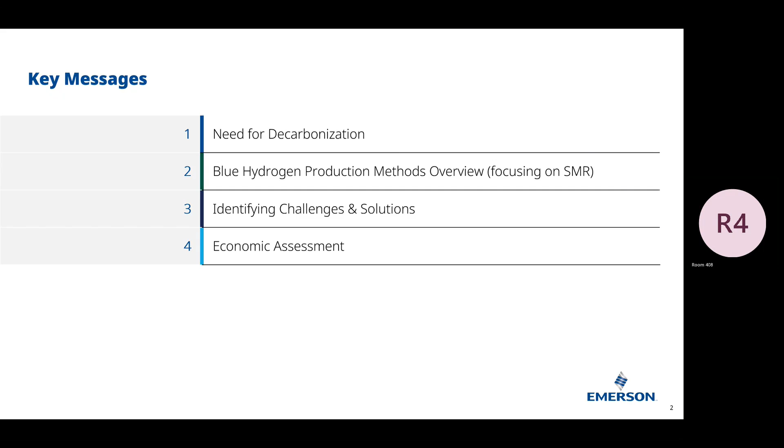So, need for decarbonization. The United States has re-entered the Paris Climate Agreement. And along with other countries, now there's been emphasis on decarbonizing emissions and exploring new energy markets. In fact, the global demand for hydrogen is expected to reach almost $12 trillion by 2050. And feedstock natural gas for blue hydrogen production primarily. There are other methods with coal. But because of the natural gas supply in the United States and Canada, blue hydrogen production is very prevalent in North America.

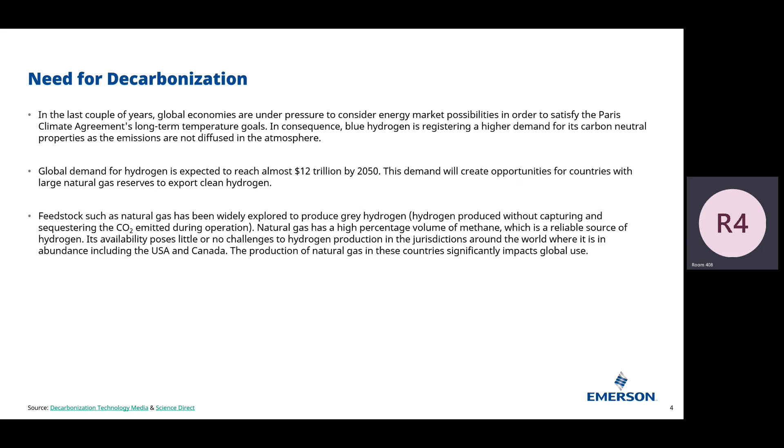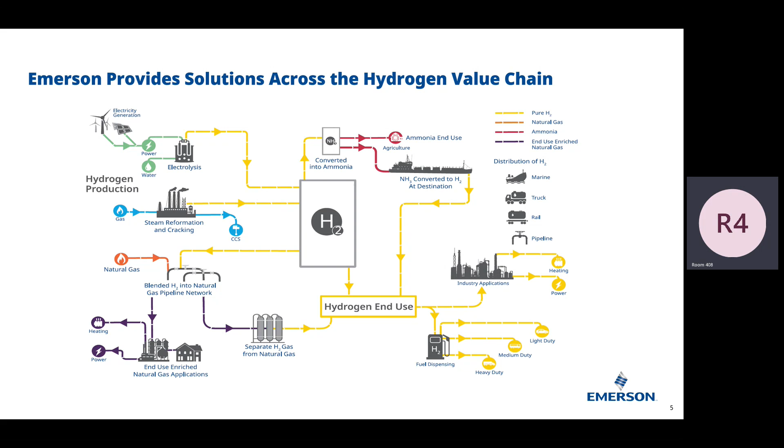So Emerson has products that cover the full value chain of hydrogen production. We have an ebook on green hydrogen, which is through electrolysis. We won't be discussing that today. We'll be focusing on steam reforming and primarily using natural gas as the feedstock for that. So I'm also going to go over the end use of hydrogen, specifically for industrial applications, even though they could be used for fuel cells and to produce ammonia.

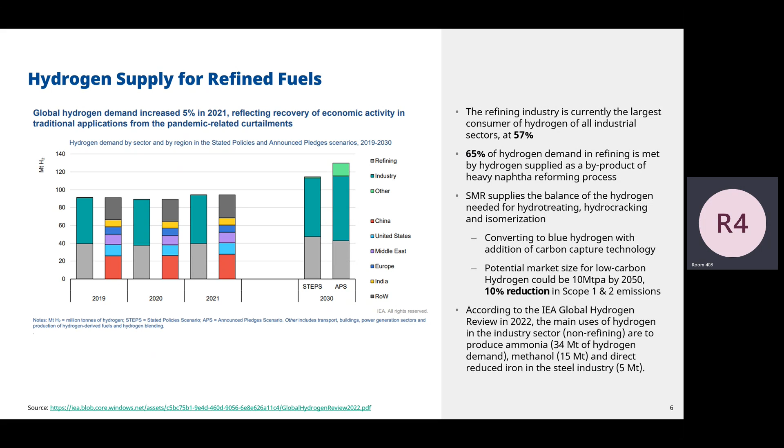Okay, so refineries are the largest consumers of hydrogen. They consume about 57% of the demand. Mostly the hydrogen is supplied as a byproduct from the heavy naphtha reforming process. And this balances out with the SMR process, which currently is primarily gray hydrogen. So the difference between blue hydrogen and gray hydrogen is the carbon capture portion. If you add carbon capture, that is then categorized as blue hydrogen. And so I grabbed this chart here from the International Energy Agency. You can see here, refining consumes most of the hydrogen supply, as well as other industries. And then the bar next to it shows the world areas that are consuming the global hydrogen demand.

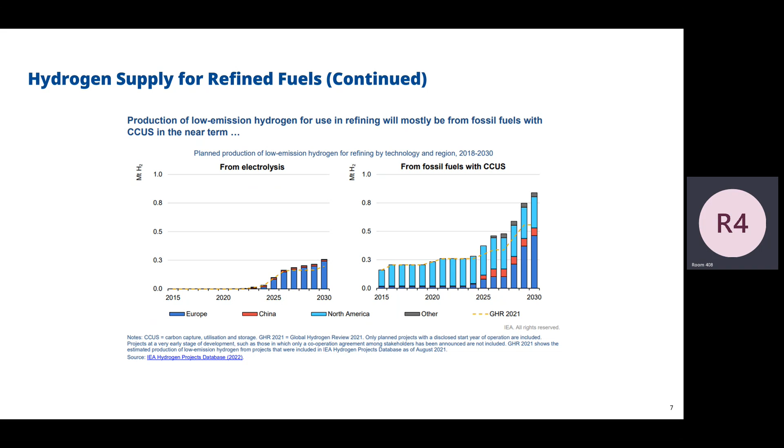All right, so moving along, refining. Fossil fuels will likely be the source of hydrogen production with carbon capture, not electrolysis. And biofuel production will also increase the global hydrogen demand because renewable diesel requires more hydrogen than traditional diesel processing. And there's also state incentives for biofuels. California is the leader in this, and Oregon, Washington, and British Columbia are also following those incentives as well.

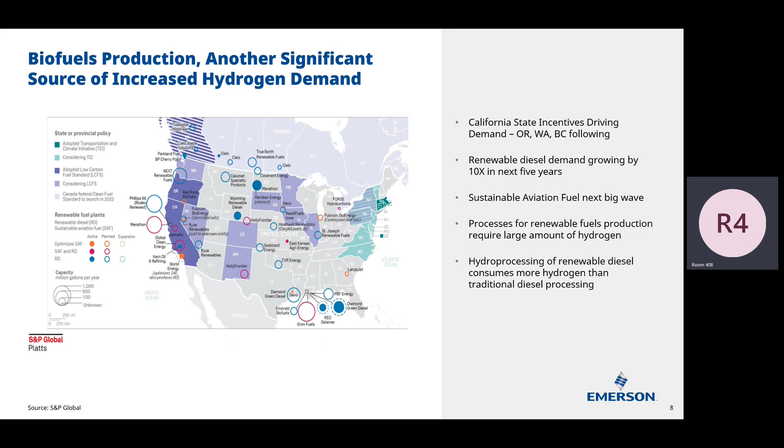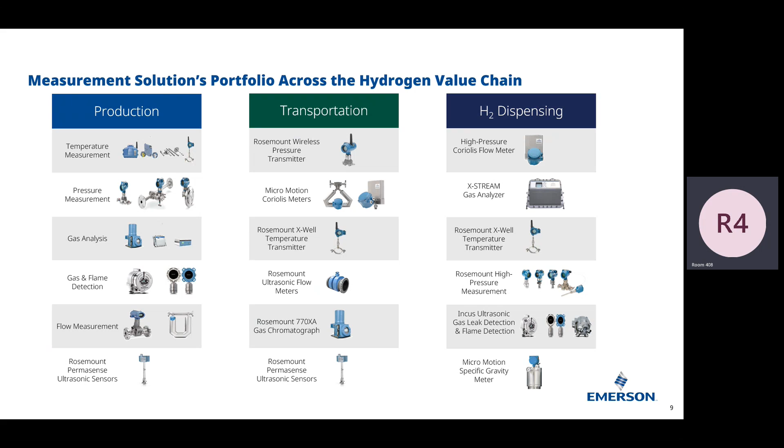So Emerson has measurement products for the production portion, transportation, and hydrogen dispensing. For blue hydrogen, it's not shown here, but you can also use a density meter as well. But I will be covering that in another slide.

So let's talk about the blue hydrogen production process. So aside from steam methane reforming, there's autothermal reforming and partial oxidation, which I refer to as POX. And I won't go into detail on that, but SMR is currently the primary method for producing hydrogen, but right now, gray hydrogen. So don't assume that mostly it's blue hydrogen. It's certainly gray. And natural gas is the main methane source for the hydrogen produced by industrial facilities and petroleum refineries.

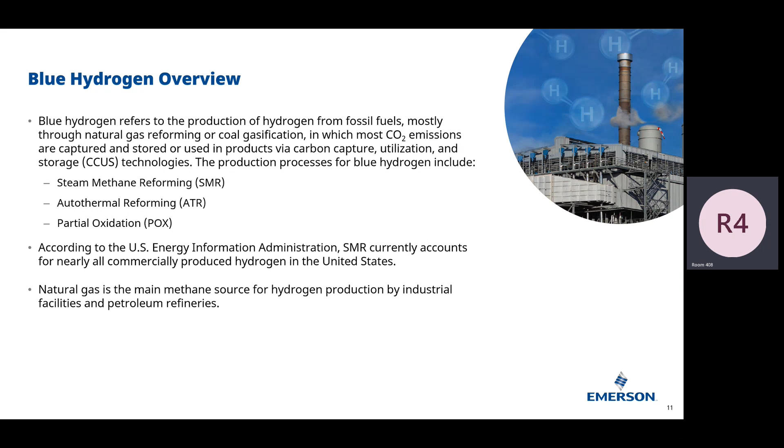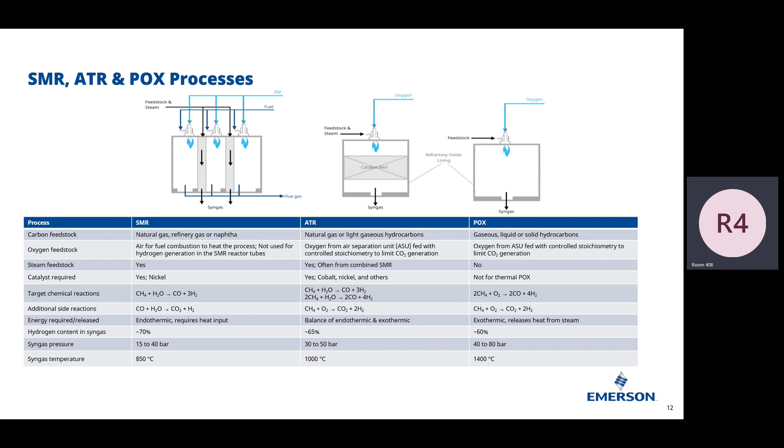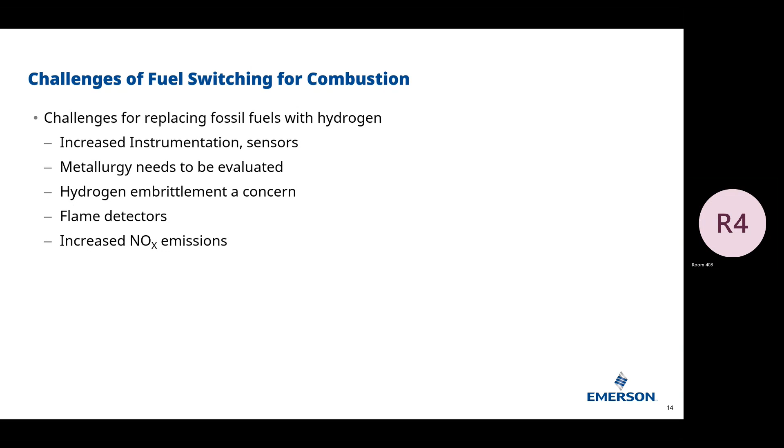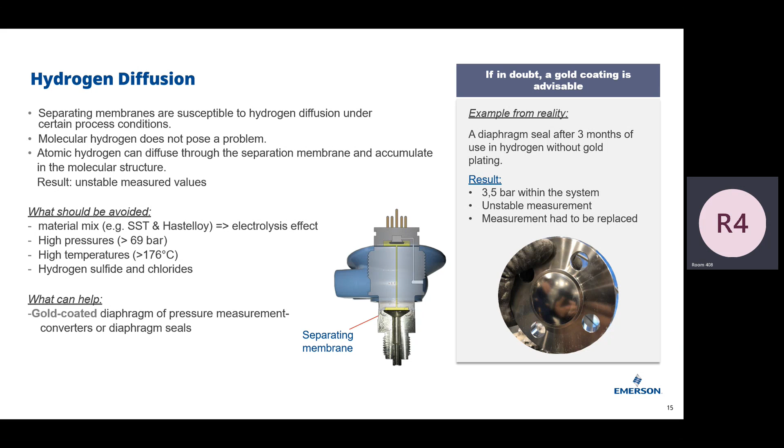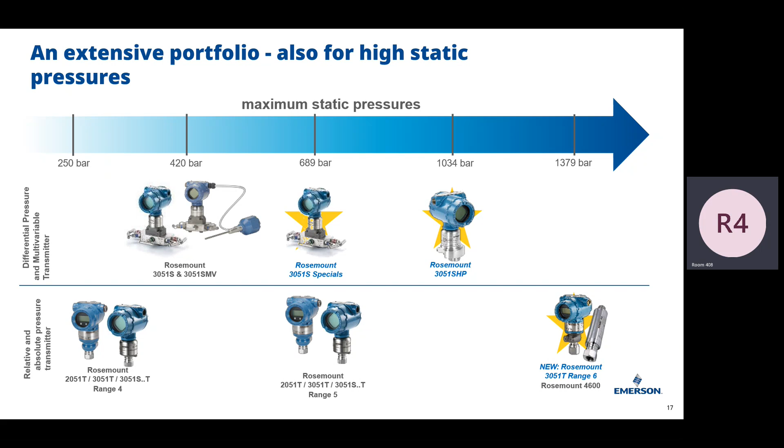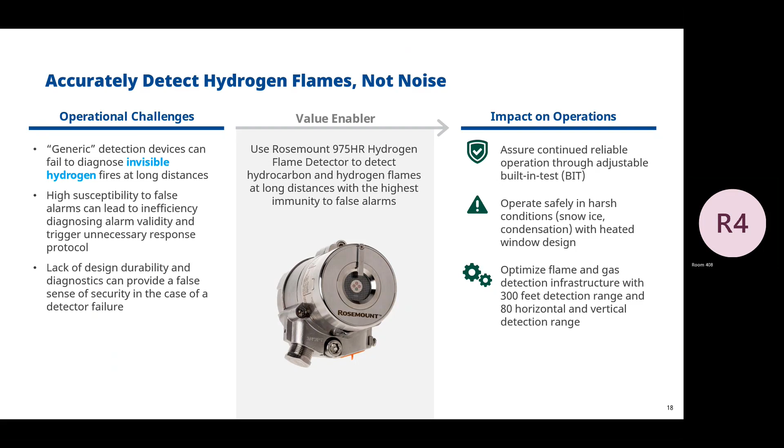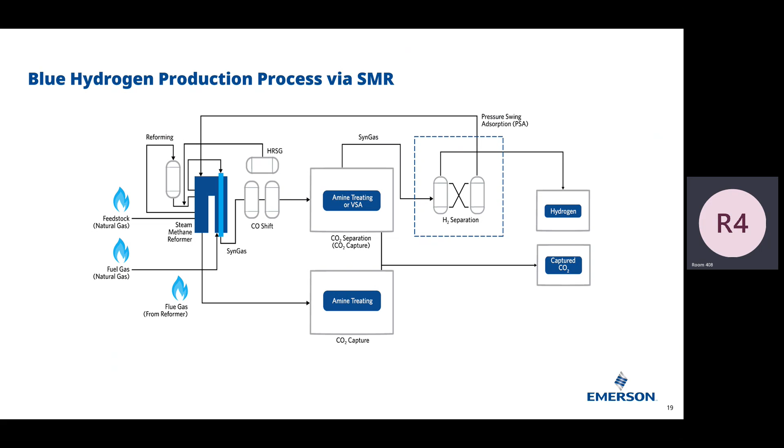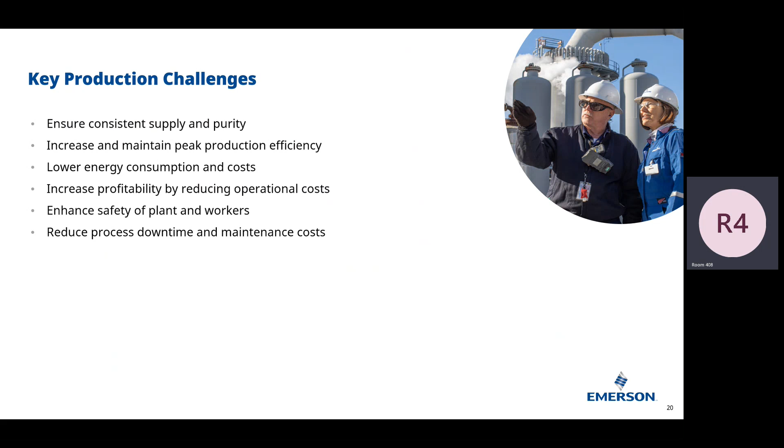This is primarily focusing on the SMR, where we've identified the instrumentation you would use, so the flow transmitters and the analytical equipment as well. Let's talk about these in detail.

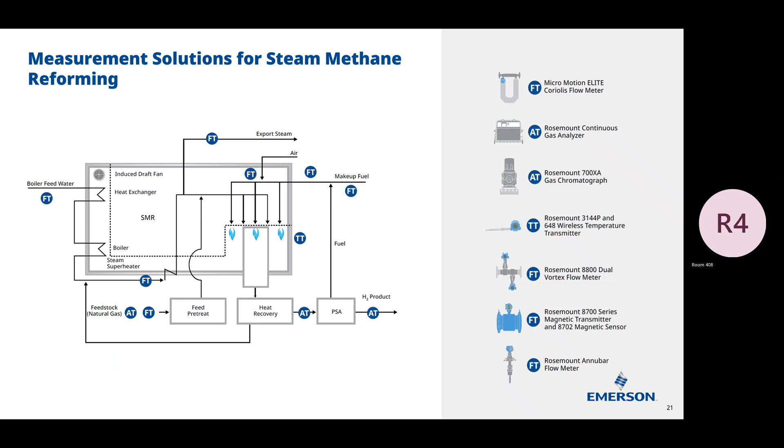But first, let's talk about the common threats for steam reformers. So it would be high temperature variability, improper steam to carbon ratios, flame instability, high tube wall temperature, high excess air in flue gas, and combustion air deficit.

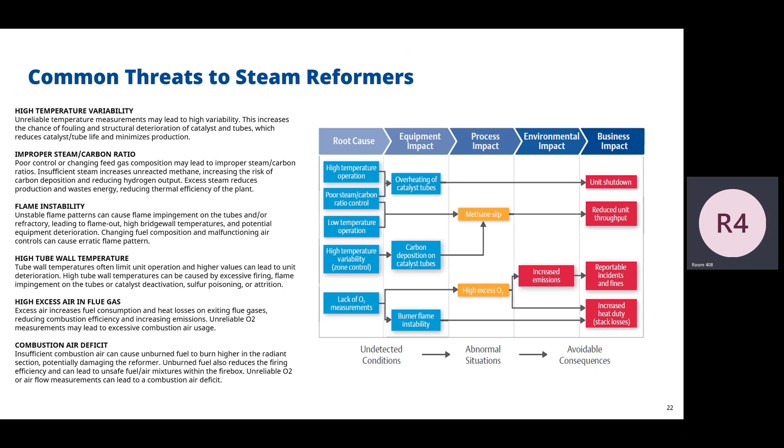For the steam to carbon ratio, this is an issue because natural gas is 70 to 90% methane. You also have ethane, butane, and propane. Changing the feedstock quality leads to challenges in controlling the steam to carbon ratio. I've included here a table where you can see the pounds of steam per pound of hydrocarbon for methane, ethane, propane, and butane.

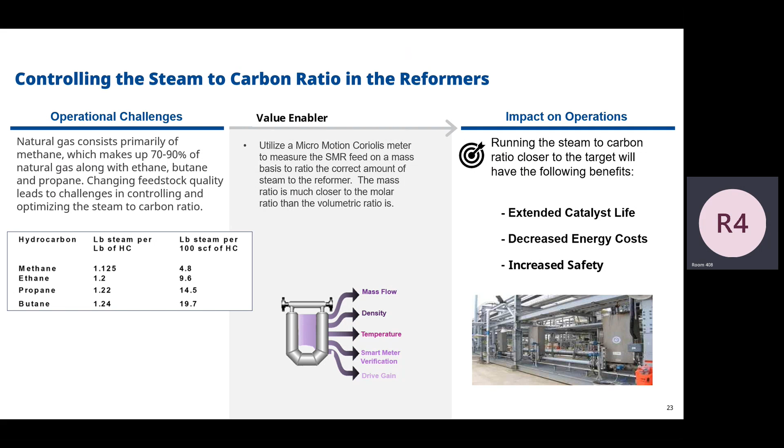So we would suggest a Coriolis meter, specifically a Micro Motion Coriolis meter, for mass flow, because the mass ratio is much closer to molar ratio than volumetric. By using this, you could extend the catalyst life, decrease energy costs, and increase safety.

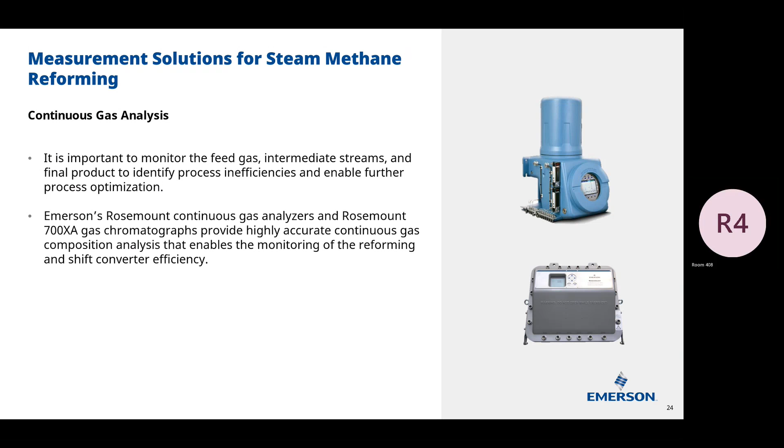For gas analysis, you want to monitor the feed gas and intermediate streams, the final products. So we have the Rosemount Continuous Gas Analyzer at the bottom, and the Rosemount 700XA, which is the blue device on the very top here, for monitoring the reforming and shift converter efficiency.

For hydrogen flow, you could use differential pressure, vortex, Coriolis, or ultrasonic meters. Vortex meters are commonly used for hydrogen applications because they offer fewer leak points. And here we have pictured the Quad Vortex meter. Emerson's the only one that offers this device for enhanced safety.

And for custody transfer applications, we would suggest the Coriolis or an ultrasonic meter. Understanding not only the application, but the process conditions, can help you figure out which type of flow meter you need.

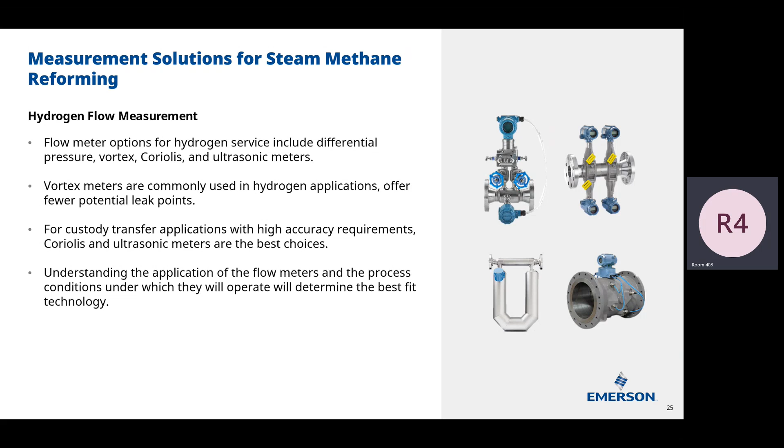So for water flow measurement, specifically boiler feed water, you want your feed water to be of high purity, so low conductivity. We don't want to use a mag meter for that reason. So we would suggest the vortex meter, specifically the 8800 multivariable vortex meter, which has a built-in temperature sensor. This removes the need for additional gaskets and seals compared to other designs.

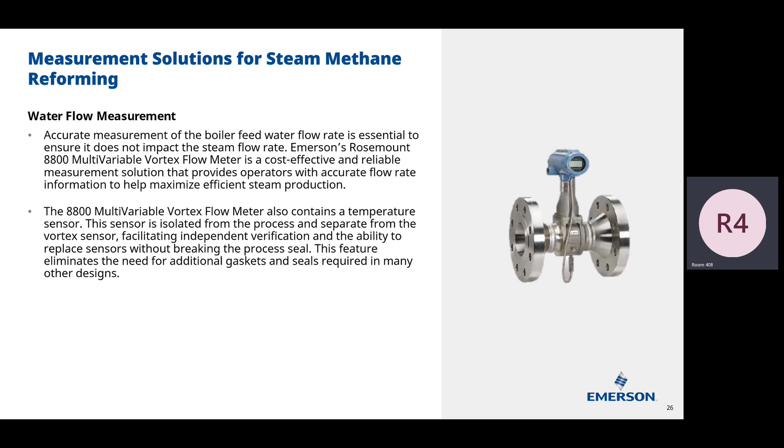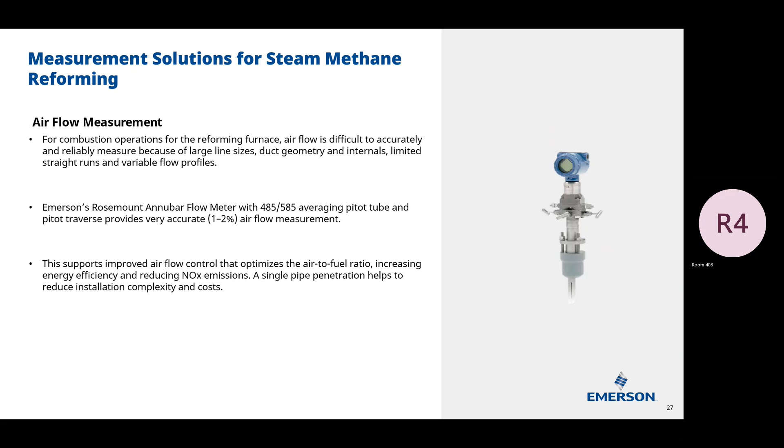For airflow, to optimize the air to fuel ratio in the reforming furnace, we recommend the Rosemount 485/585 Annubar averaging pitot tube, pitot traverse, which provides 1 to 2% accuracy. Optimizing the air to fuel ratio will assist in reducing NOx emissions.

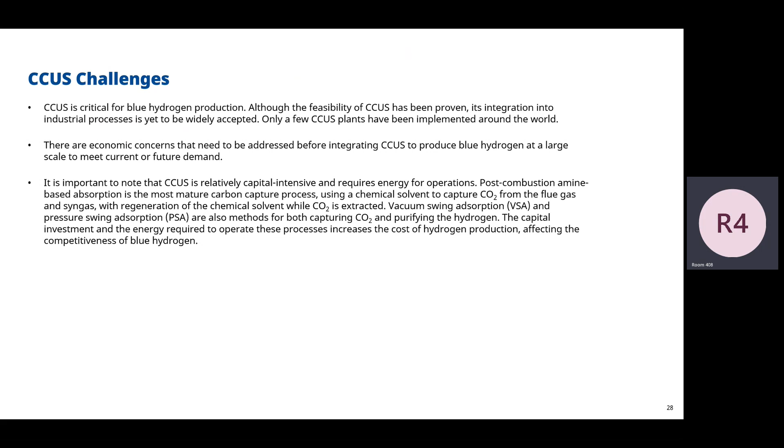So to lower costs, we would recommend the Micro Motion density meter to manage the amine makeup, because the density meter infers rich or lean amine quality, to automate the solvent quality sampling process, so you don't have to do manual sampling.

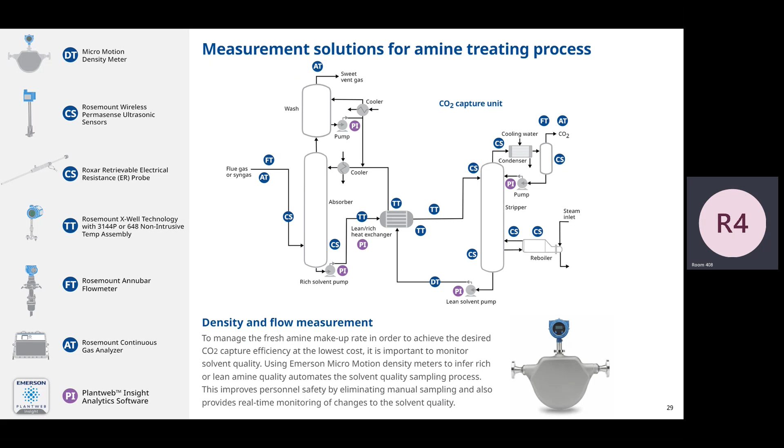We've also, once again, identified the instruments that you would use throughout the amine treating process for carbon capture. And you could also monitor the pump and heat exchanger performance as well, using Plantweb Insight. In addition, you would use corrosion sensors, which also have Plantweb Insight applications.

And so the amine treating process, corrosion is very prevalent due to the carbonic acid attack in water, when the water condenses.